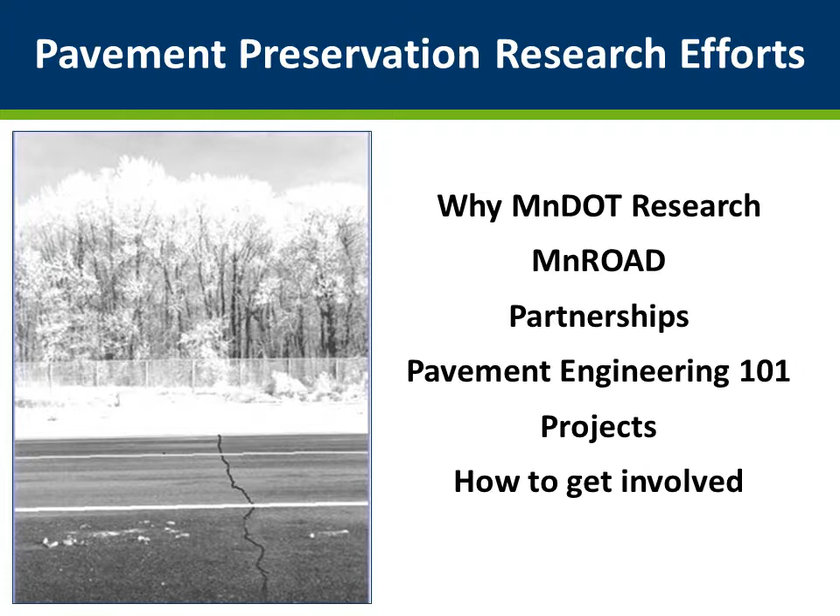A brief overview of what I'm going to be talking about today: first, why does MnDOT do research? Then what is the MnROAD facility? Who are our partners, who do we work with? I'll also cover pavement engineering 101, the challenges we face as pavement engineers, and then my favorite part, highlighting some of the projects, and how students especially, or anyone interested, can become involved with us.

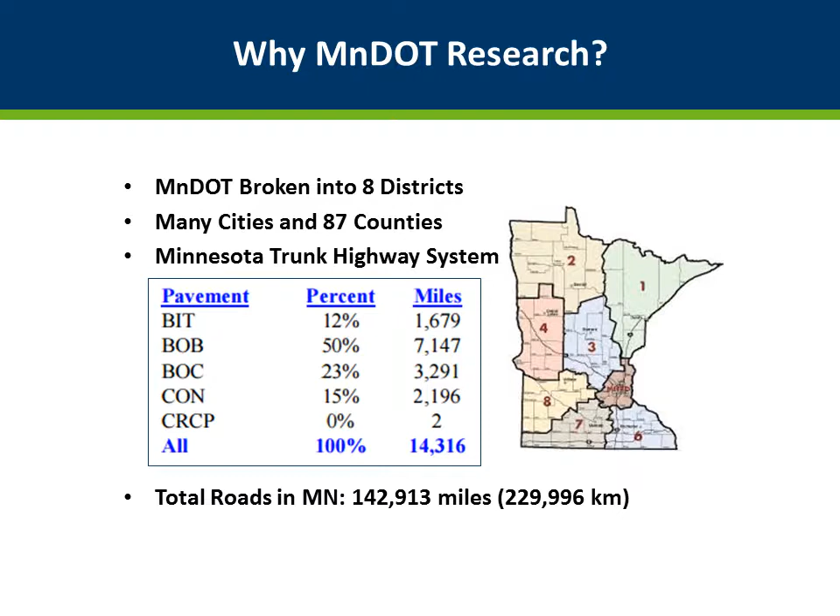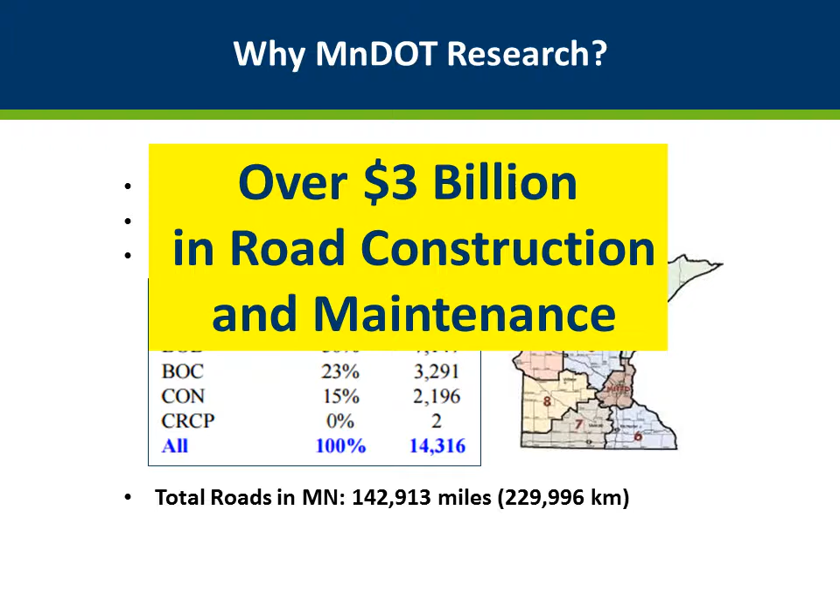So starting off, why MnDOT research? MnDOT is responsible for over 10% of the roads in the state, a combination of bituminous, which is asphalt, asphalt over concrete, and concrete roads. The big reason why research matters is that last fiscal year we spent over $3 billion in road construction and maintenance. So our goal, especially at MnROAD, is making our pavements last longer and cost less financially and cost less to the environment.

Now getting into the MnROAD research facility, how many people have driven I-94 from the cities to St. Cloud? Thank you all of you for providing free traffic to our research facility.

Accelerated pavement testing facilities like MnROAD are pretty unique and rare. The only one even comparable in scale is in Auburn, Alabama, where they pay truck drivers to drive and traffic their trucks. Here at MnROAD, we use the general public and the traveling public to traffic our roads.

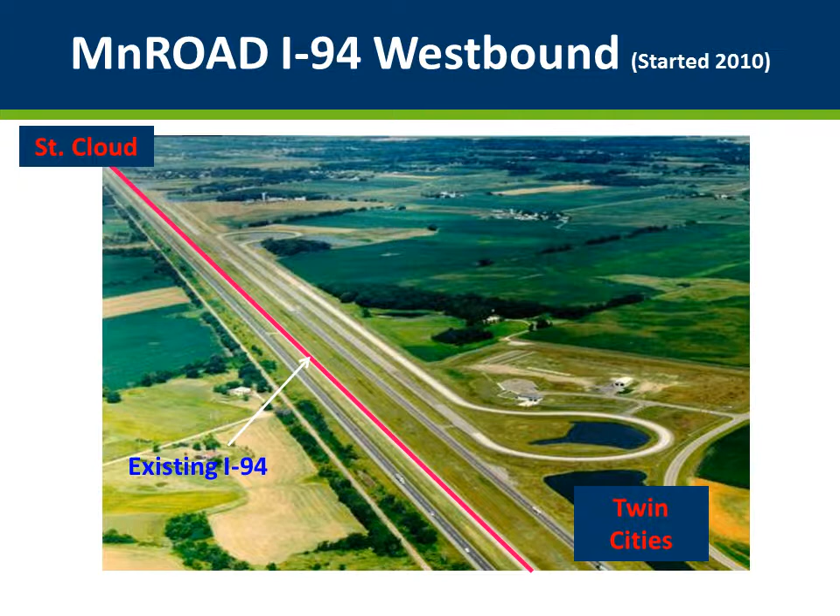We have the existing I-94, built in the early 70s, a jointed concrete pavement. Parallel to that is what we call the MnROAD main line. If you've driven this, you've seen the big overhead gantry lights, which divert traffic to the right, and then you'll see the pavement change every 500 feet, looking like a quilt. Each of those is an individual test section where we try different pavement materials and structures. I'll get into some of the sensors we have going on in there as well.

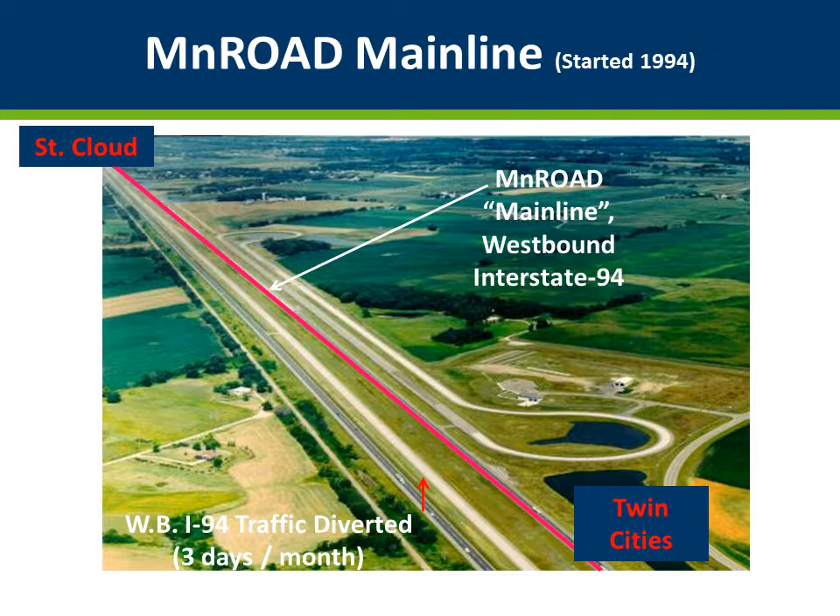Next time you drive through, now you'll know what you're doing, and there's even an AM radio band you can turn to and entertain your whole family as you're driving through, in case you forget some of the facts I'm presenting today.

We also have this loop, a little further inside, divided by a fence. This is a closed loop facility where we have a semi-truck driver whose sole job is to drive circles around it five days a week, eight hours a day. He shoots for 80 laps on this 2.5 mile loop, and we have the same kind of setup with 500-foot test sections.

The purpose here is more to simulate a low volume road, so we have thinner pavement structures, less base work, less preparation, and some more exotic materials. For example, in 2017 we brought in a bunch of clay to simulate a late construction season event, where we had wet, sticky clay we couldn't pave over with typical paving methods. It became a large stone base experiment, so we brought in softball-size stone, one section with 9 inches of this large stone base, the other with 18 inches. We learned within half a day trying to place the 9-inch section that it wasn't going to work; we needed a reinforcing grid to be able to do that.

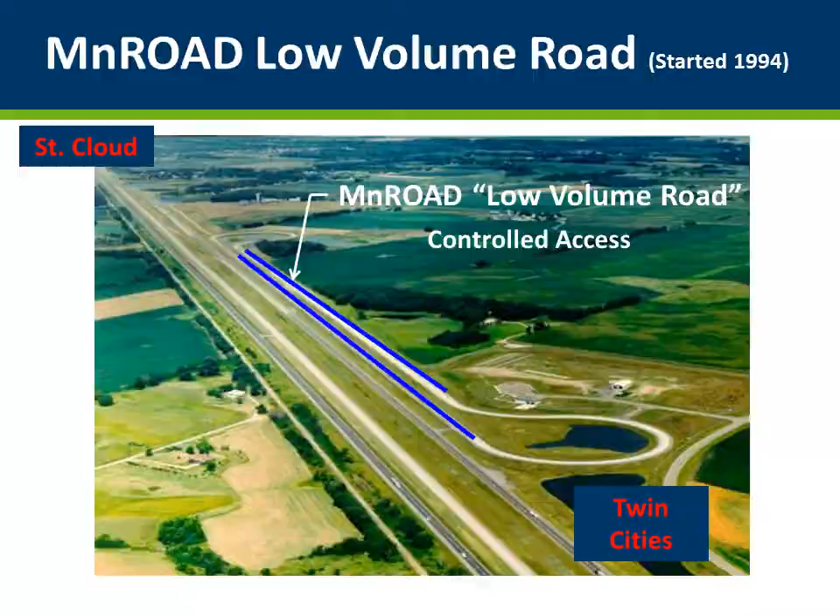A little bit of history: MnROAD was initiated in the early 90s and has 23 years of customer service. It is an internationally recognized facility. For those who haven't been there, I'd encourage everyone to go, whether you're a student or a practicing engineer. I have my email at the end, you can take a card, but we're always willing to come show you, because as taxpayers in Minnesota, you've helped support this research effort, and it's truly a treasure in your own backyard.

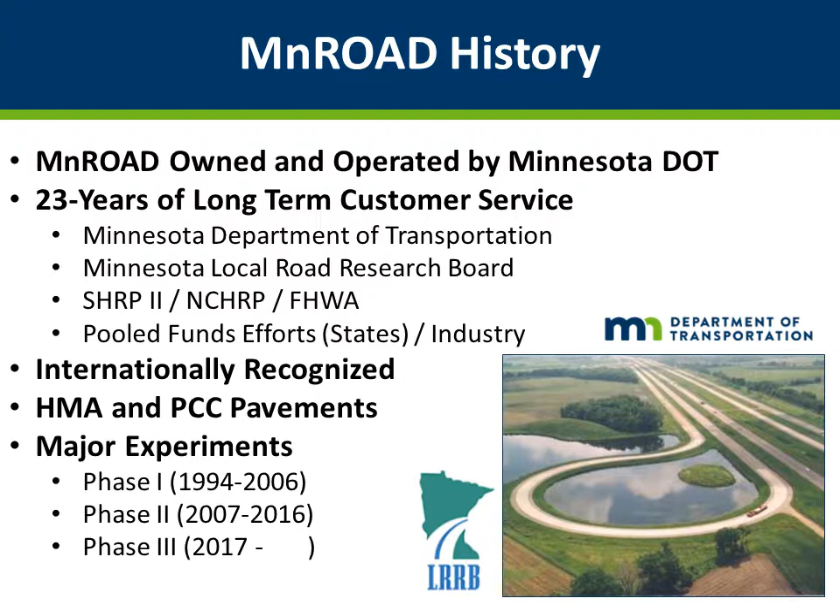We have asphalt and Portland cement concrete. We're currently in the third phase of MnROAD, and I'll get into it more later, but we're expanding our partnerships as well. We still do MnDOT-only research, with a couple sections internally funded just by MnDOT, but we also have partnerships with other upper Midwest states, one of the research facilities in Alabama, federal highway, and private industry partners as well.

So there are currently over 35 ongoing research studies. We have test sections combined into research studies with 141 unique test sections. On the I-94 mainline, we have 12 ongoing studies.

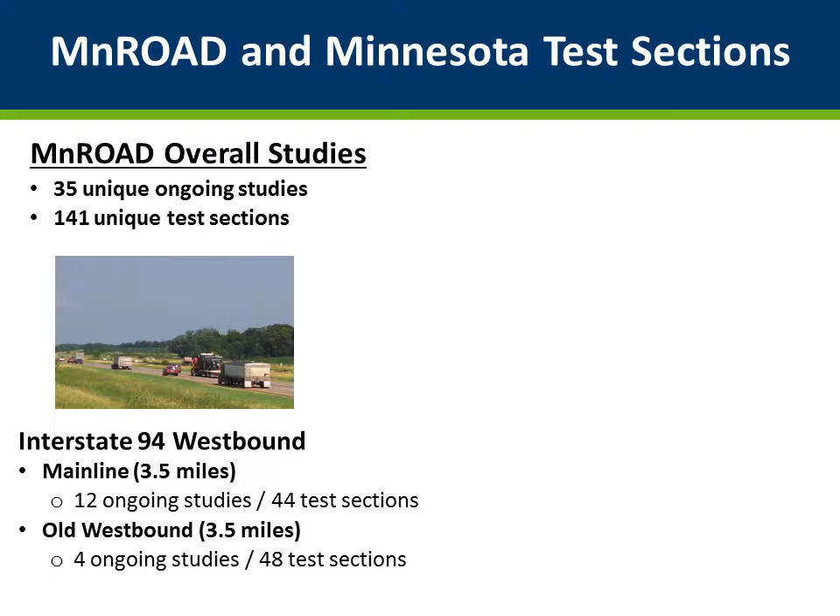And then in 2017, we went back to the original concrete pavement, which we call Old Westbound, the original I-94 concrete, and we started placing research sections on there. We don't get as much traffic as we do on our main line because we have traffic one or the other, and we try to keep traffic about 80% of the time on the main line.

And only switch it back to the old original construction when we need to do our testing or construction type activities. And then the low volume road, there's 19 studies, 49 different test sections. I list the Minnesota Local Road Research Board here - they're one of our major sponsors and players with MnROAD and supporters, even from the early 90s.

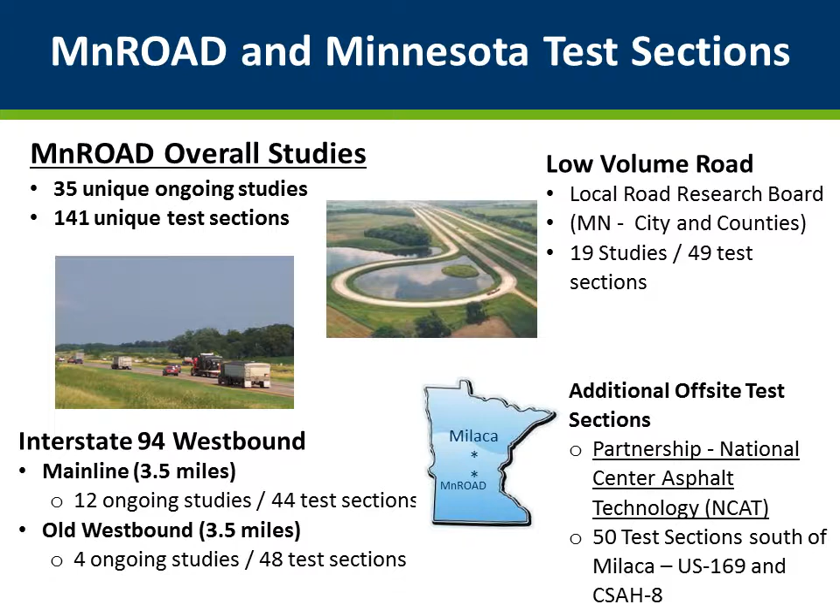They're one of the reasons MnROAD exists today, and we still try to keep that relationship and support local county road research that a lot of us drive on our way home every day. And then in 2016, we started some off-site experiments, which are still under the MnROAD umbrella, near Milaca. We have on 169, and I'll talk more about these later, some pavement preservation experiments on US 169 as well as County Road. It's in Pease, Minnesota, for those of you that are familiar with that area.

So our traffic loading, it is live interstate heavy truck traffic, about 13% truck traffic on the interstate. I would argue it's a little more than that just from looking out the window and seeing the trucks go by all afternoon and all day.

And then our low volume road, we have a 5-axle typical tractor trailer that is loaded to the legal limit, and he drives in circles 80 laps a day.

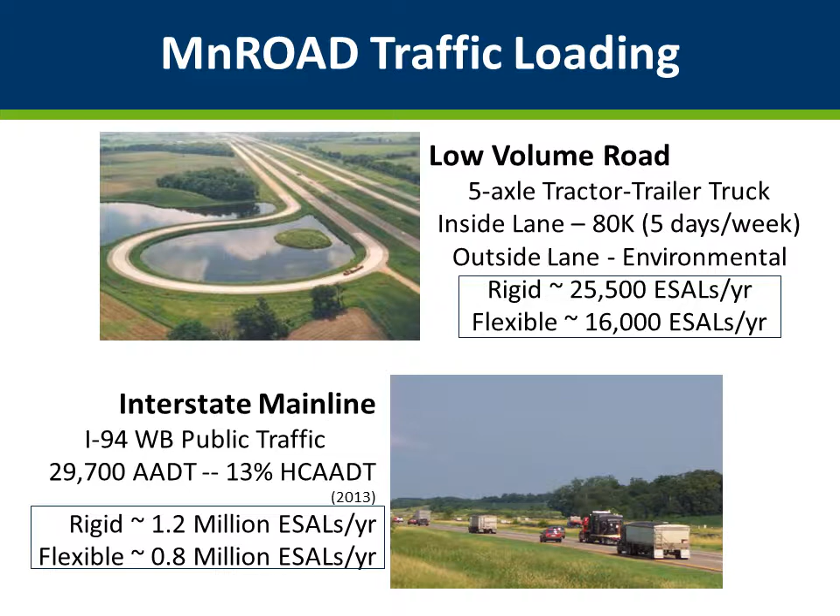So operations support, which is the team that I am a part of, we're actually based in the Office of Materials and Road Research within MnDOT out of Maplewood. And then we are back and forth between the two sites. Some of us are actually based up in MnROAD, which is technically in Monticello, Minnesota. But our job is to do research and development, partnerships, construction, traffic loading, performance monitoring.

So we build these test sections and then we monitor the performance. When I say monitoring performance, we are literally, I was out there yesterday counting cracks and making crack maps. We do everything from visual distress surveys like those crack maps to automated equipment that uses 3D cameras to do the same crack mapping that our pavement management uses on a network level.

And then we're measuring rut, IRI, the structural integrity with falling weight deflectometer. And then we have an array of environmental and dynamic sensors. Basically, our environmental sensors are monitoring how the pavement and the pavement structure is changing due to the environment. And then our dynamic sensors, how are they changing under traffic? We use our truck, our semi-trailer, which we have known weights on each axle, and then we measure the pavement response from that known axle weight.

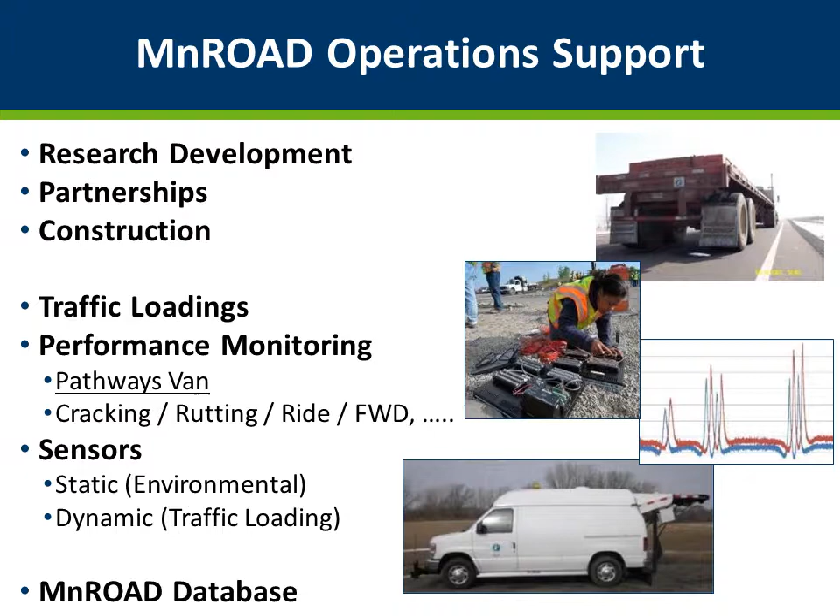And all of this goes into the MnROAD database, which is available to anybody. It's online, but it's accessed by researchers around the world. There's people from Alaska to Florida and everywhere in between who have done a thesis off of MnROAD data and have never actually been to Minnesota. I'm sure internationally as well, other places use MnROAD data, but just for an example, within the US university system, our database is used frequently.

Winter operations, we kind of are starting to dial it back for the winter. We're filling in our last few crack maps and that kind of stuff before everything is completely frozen.

But our low volume road, it is treated like a county road where depending on the truck driver and depending on how much snow, he might not even plow. He might just take the truck and go slow for a couple laps and let the snow kind of push out. Whereas the Interstate 94, that's actually taken care of by MnDOT District 3 maintenance out of Monticello.

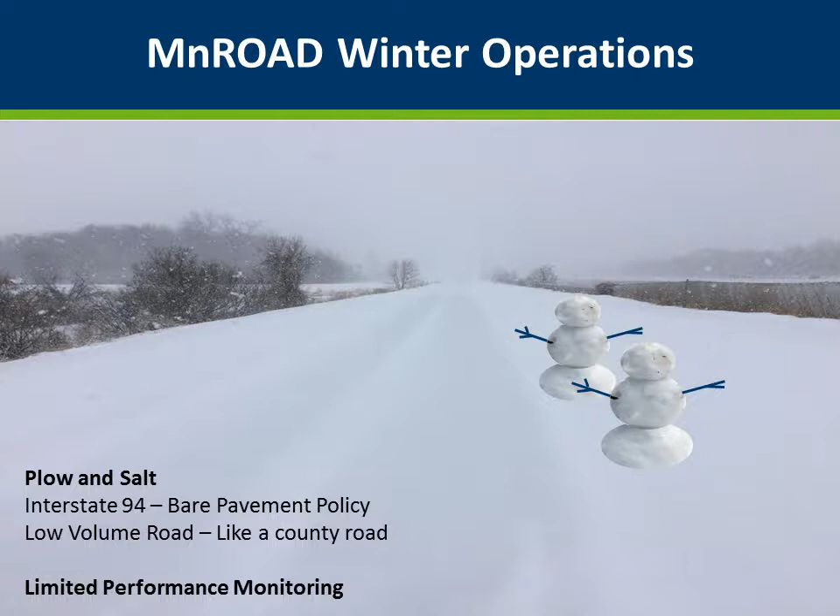There's a truck station that we work closely with, and they're actually the ones responsible for maintaining that. And they have a bare pavement policy, so after there's a snow event, they get all the way down to bare pavement just as if there was not a cold weather event.

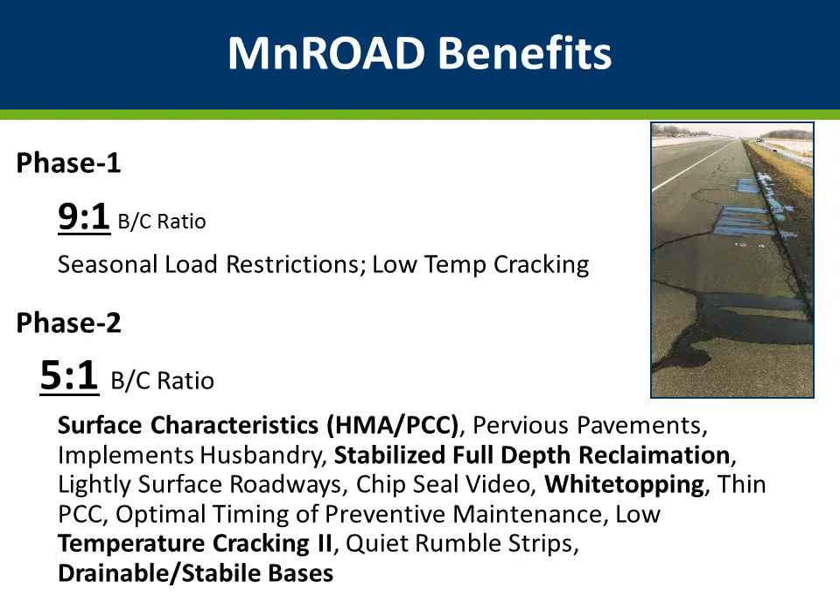Benefits of MnROAD. We've done lots of studies showing cost-benefit ratios depending on the specific experiments, and I'll talk a little bit more about these experiments later. But huge benefits, 9-to-1, 5-to-1, and I'll get into details of these projects further in my presentation.

So now to the partnership section. Who are we currently working with? In 2016, the National Road Research Alliance was initiated. How this got started was MnROAD had $2 million in construction money. We had test sections, but we wanted to reach out to other states and get more national involvement, so we created the National Road Research Alliance.

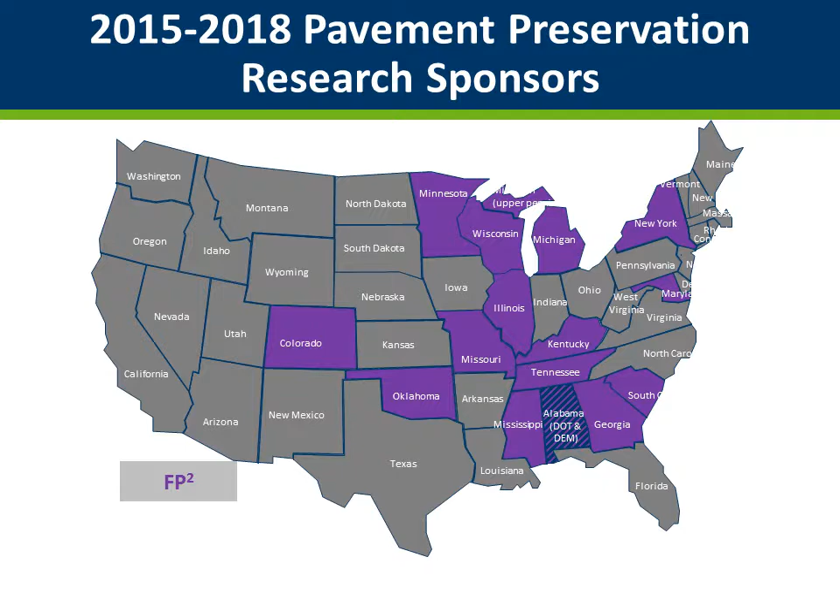Another thing - chip seals. Our chip seals get beat up by snowplows. They don't have snowplows, so their chip seals tend to stay a lot longer, but they do see more bleeding and flushing with some of their heavier chip seal applications that we don't see here in Minnesota.

Our base is mainly there to support our construction traffic, and so our interaction is with the slab itself that's moving. Whereas our flexible pavements do just that - it's an asphalt pavement, or bituminous hot mix as you'll also hear it called - but the pavement, a wheel comes over and it actually bends and flexes underneath the wheel load. Then we have our composite pavements, which are concrete over asphalt or asphalt over concrete.

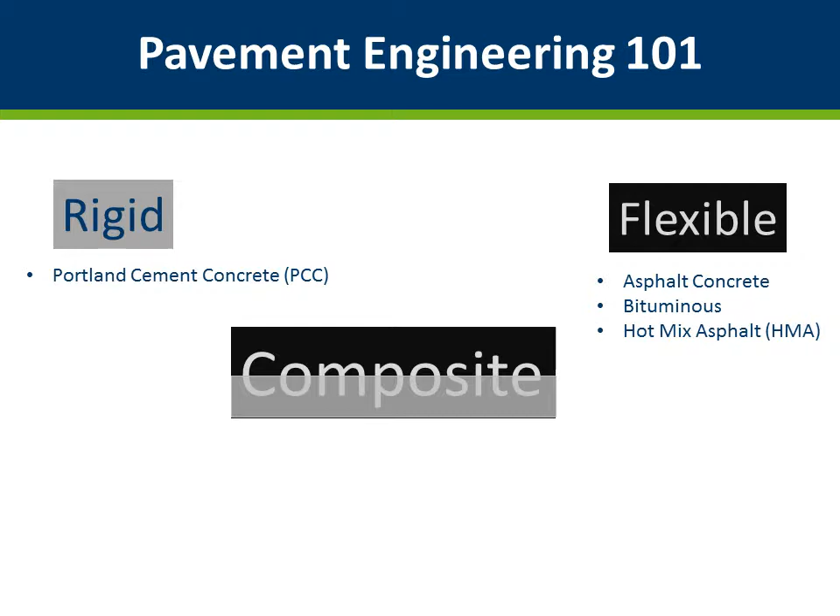Now looking at specific distresses we're trying to address and fix at MnROAD: in an asphalt pavement, we've got our top-down cracking, our rutting, which I'm sure everybody has seen at intersections. Rutting and top-down cracking are traffic-related distresses, so you'll see them occurring along the wheel path. Then you have transverse cracking, or low-temperature cracking as it's also referred to. Basically, as temperatures get really cold, the asphalt binder contracts and then snaps at the weakest point. It's just a stress relief, and then we get these cracks that are more or less regularly spaced within our asphalt pavements.

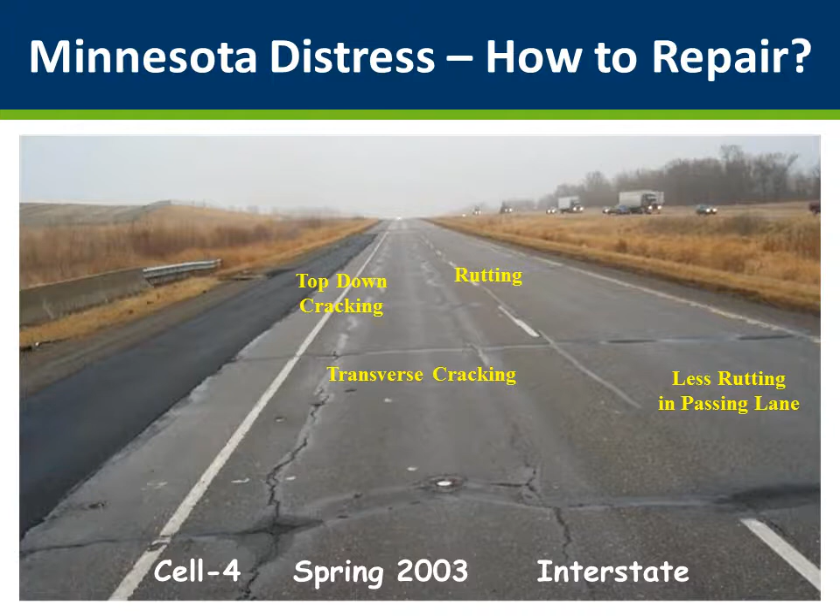Similar yet different challenges with our concrete pavements. For concrete pavements, your joints are your weakest spot where water can come in. You have faulting that occurs at joints where one panel ends up tilted, because the truck hits the front and pushes it down a little, raising the next end. We refer to that as faulting, and you can feel and hear it as you drive down old concrete pavements.

Now getting into MnROAD research projects, this slide is my favorite because it's the instrumentation I get to work with the most. This is a schematic of our sensors. We have PGs, which are earth pressure cells, basically a pressure plate, and then the LEs and TEs, which are longitudinal and transverse strain gauges.

Those are placed at the bottom of the pavement or at the bottom of the asphalt. So we're measuring how much our pavement bends under a wheel load in each direction, and how much pressure that wheel load was applying.

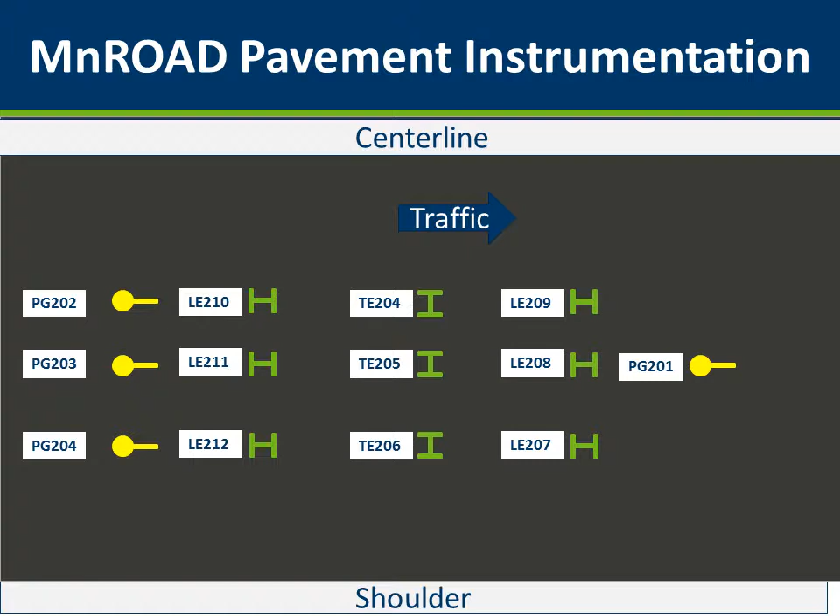From that, we're able to compare with our design software and see, okay, this was designed for an anticipated microstrain of 100, and we're getting a microstrain of 150 — we're going to have fatigue failures faster because it's bending more than we're designing for. That's the kind of information we gain from this pavement instrumentation.

Other instrumentation includes moisture gauges within the base and subgrade. We have temperature probes throughout the depth, so we can monitor the temperature profile within the pavement itself as well as within the underlying base and subgrade.

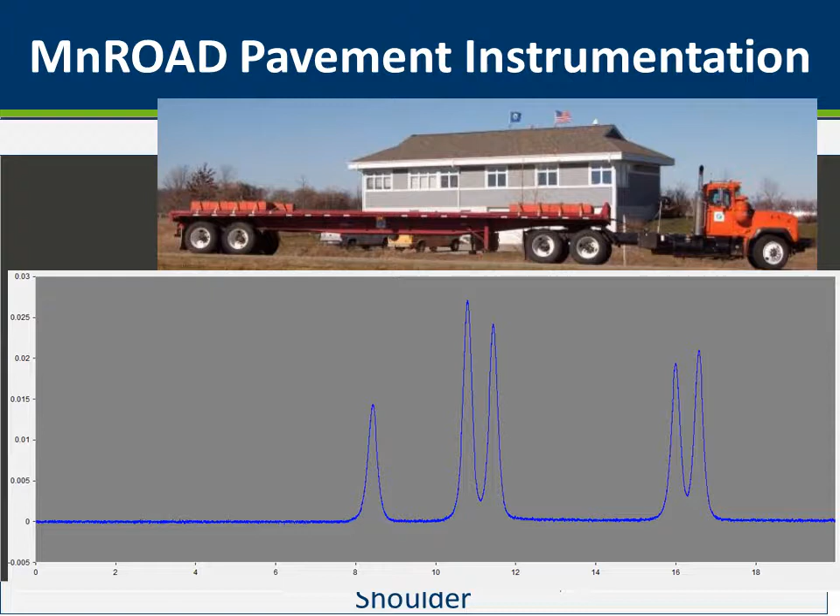Concrete gauges — we have strain gauges in concrete as well. We have two different types: one that measures truck load, and another that measures environmental load, measuring how much it's shrinking and expanding due to temperature change. We also have a new sensor we developed that we place between concrete joints, measuring how much that joint opens and closes, picking up the daily cycle as well as yearly or seasonal fluctuation.

So, specific projects — I've only been working at MnROAD for less than two years now, about 1.5 years, so a lot of these I wasn't immediately involved with, so I'll skip through them a little quicker. But some of the big highlights we've learned over the last 20 years...

Importance of drainage — yeah, it sounds intuitive, but what MnROAD is able to do is get data and prove, yes, drainage is important. We have a section here that has drainage, this section doesn't. We see failure faster in the section without drainage, and then we're able to cut a trench, dig into it, and see what water in the base or subgrade is actually doing to our pavements.

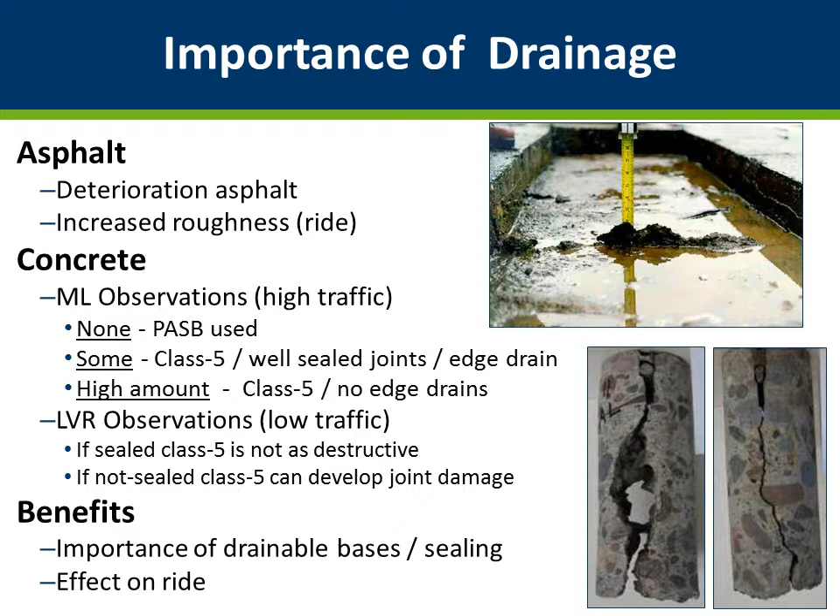Along the same lines as importance of drainage, importance of sealing — both concrete and asphalt, crack sealing or joint sealing. We have lots of side-by-side type comparisons. I'll let you guys read that one.

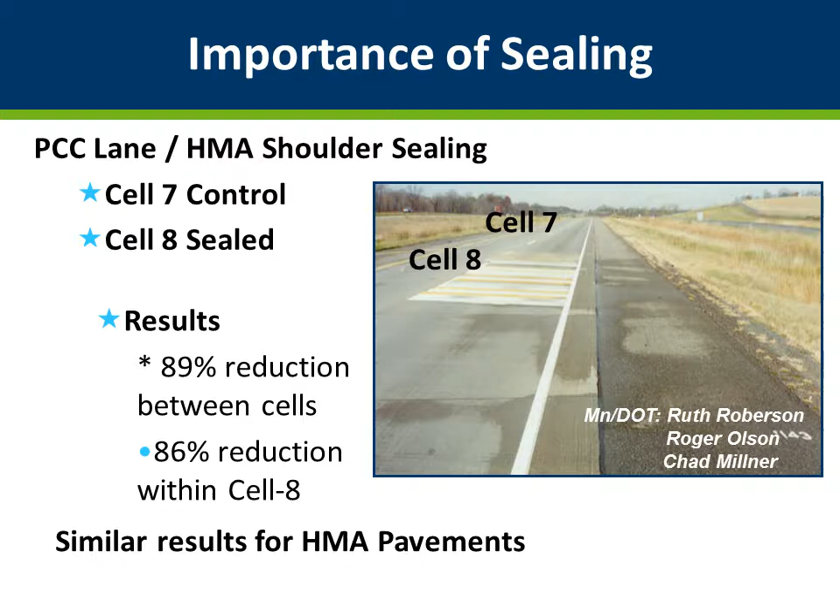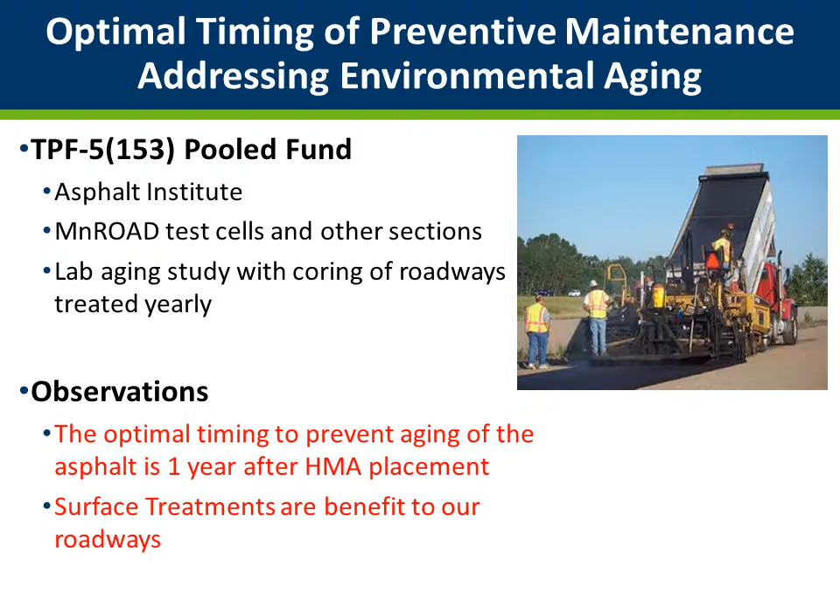Optimal timing of preventative maintenance. This is one of the things that a lot of you guys know, and those still in school will soon learn — a lot of our infrastructure has already been built, and the challenge we'll face as engineers is maintaining that infrastructure, keeping our current investments and making them last as long as possible, but also continuing to innovate, bringing in new materials, making improvements to make the infrastructure better, and doing it on a shrinking budget.

We've done a lot of chip seals at MnROAD, actually on the interstate main line. Those familiar with chip seals know it's typically used as a lower volume type treatment. We've done it at MnROAD as well, with interstate traffic going 70 miles an hour, and when done properly, they can perform well and provide a nice resurfacing treatment.

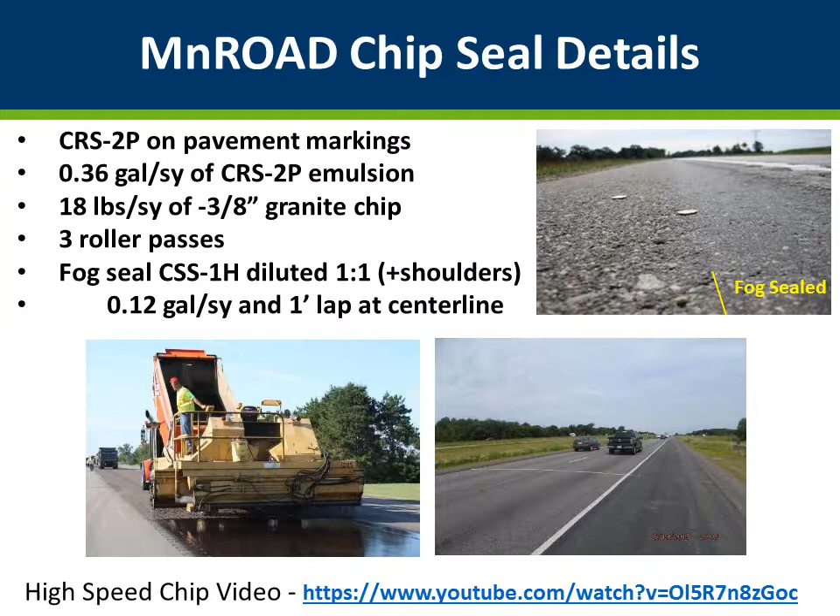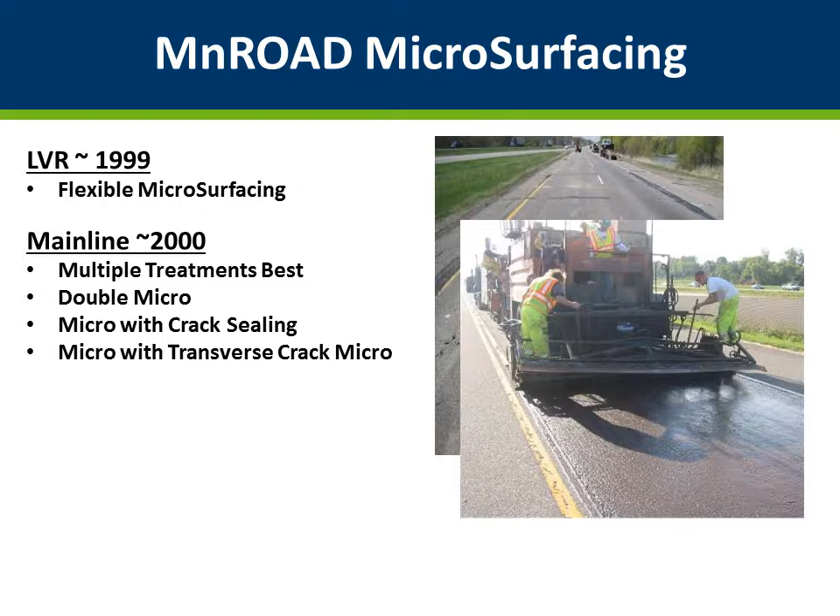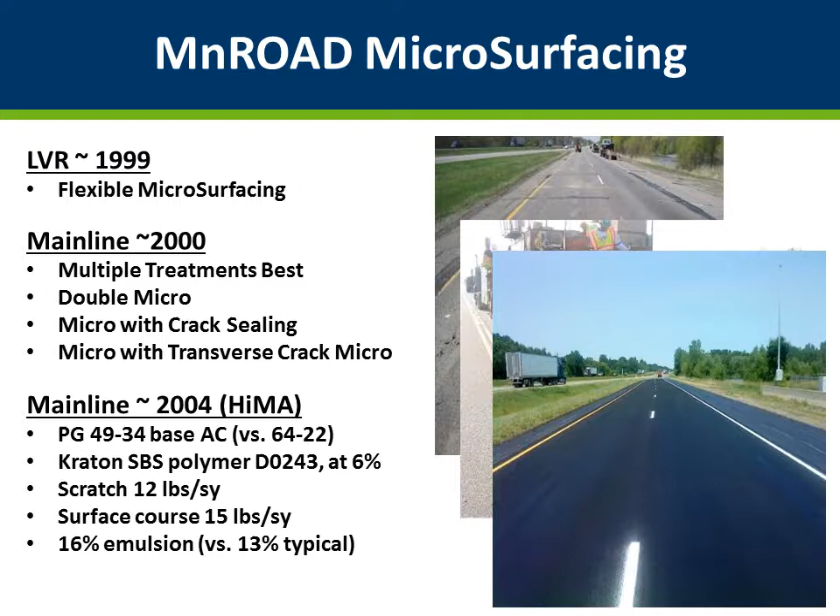Microsurfacing is another thing we've used at MnROAD, kind of a preservation type. It's applied in a slurry, a combination of asphalt with a little bit of cement in it, got real fine aggregate, and ends up with a nice smooth black surface. Some of our work in MnROAD has shown it can be a little brittle in some applications, where we're seeing cracks reflect through a bit quicker than with a typical asphalt layer.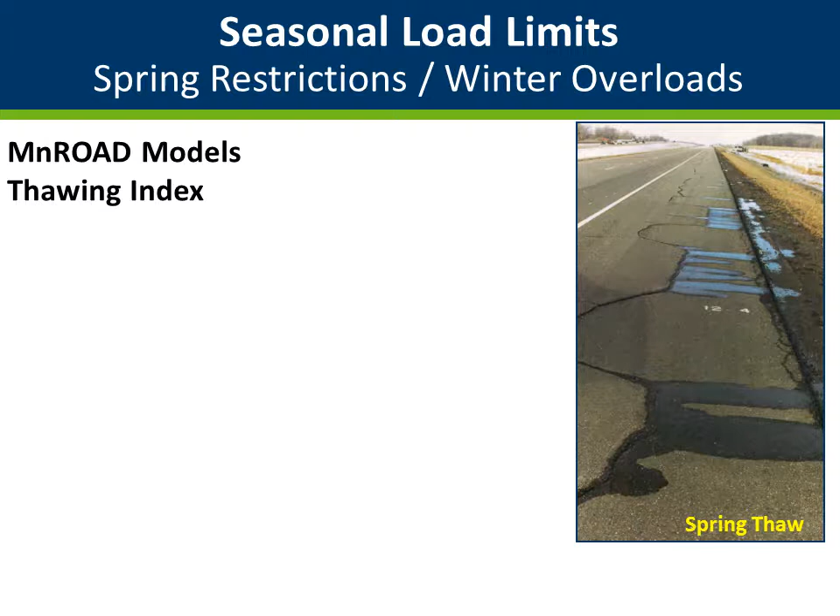This is in Otter Tail, Minnesota. What we're able to use this for is to determine when we're going to be restricting truck traffic or heavy vehicles.

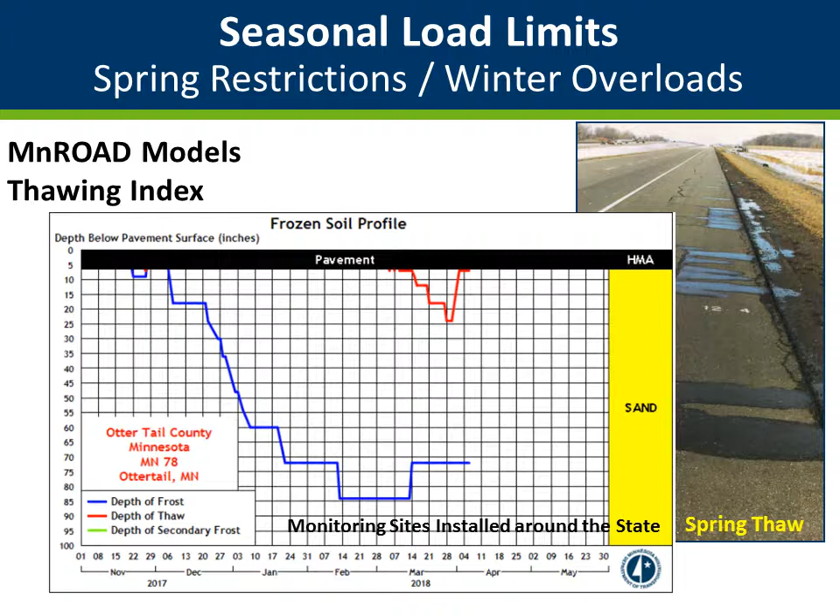For those not familiar with seasonal load limits, the issue is this area in red here, where we have a frozen subgrade. The majority of our structure is frozen in the spring months, and then as we come out of that, it's thawing from the surface down, so you get this soft, squishy, mushy layer on top of your frozen layer, underneath your more rigid pavement layer, and all the water is trapped right there. That's why when you see seasonal load restrictions, we're trying to prevent heavy vehicles from damaging our pavement at its softest point.

We do this at MnDOT, separated out by zones. We have sensors in each of these zones, a couple locations in each, monitoring the frost depth. That's why every year the seasonal load restrictions and the timing of it changes a little bit.

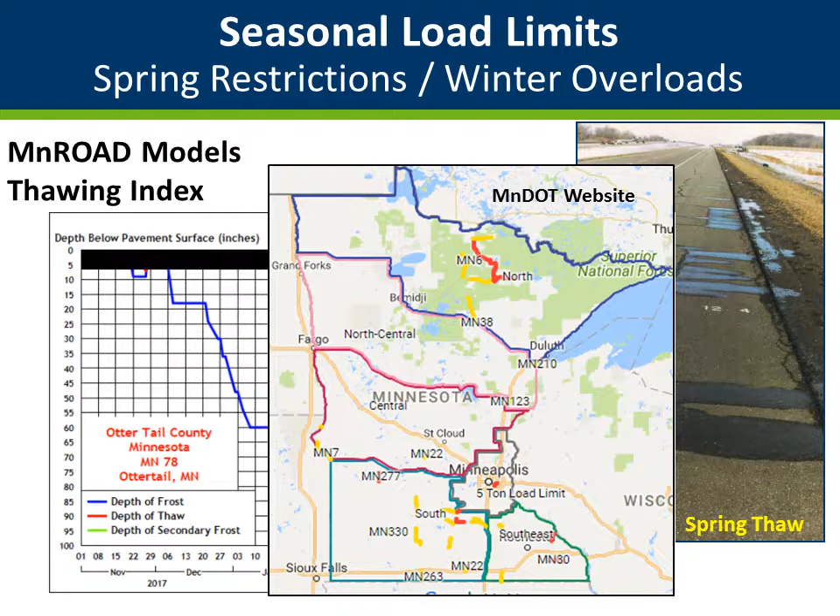One of the more unique studies we've done at MnROAD was implements of husbandry - basically how farm equipment damages a typical county road. In this study we paved a special section, both concrete and asphalt, and brought in all sorts of farm equipment and husbandry equipment. We had sensors in the pavements, different bases, different subgrades, to see how the pavement was responding under these farm equipment type vehicles, like we see on our county roads.

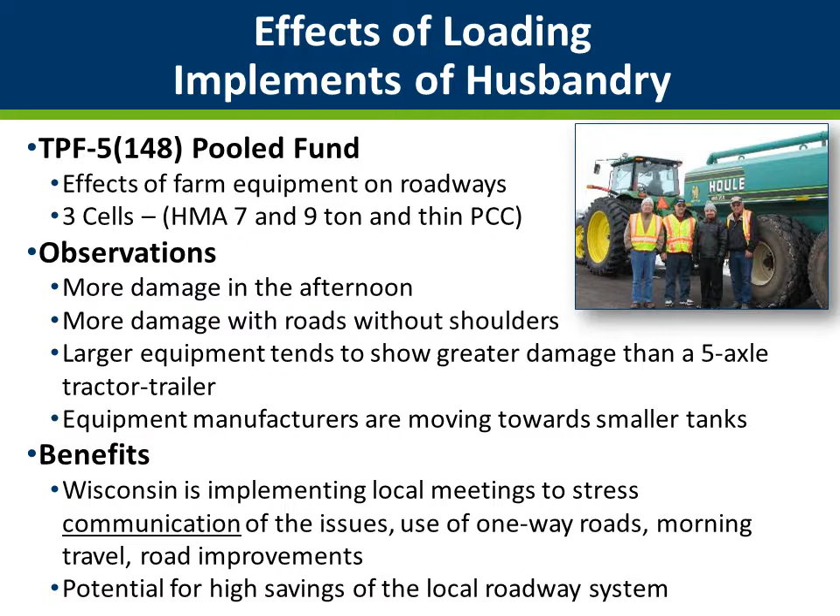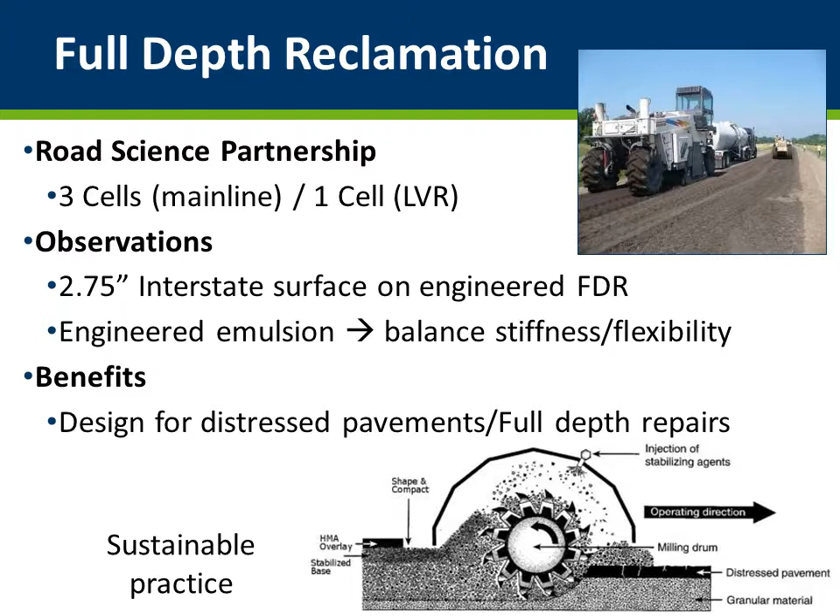In pavements and in our civil engineering industry in general, we're doing a lot more recycling than ever. This slide shows one of our projects on full depth reclamation, basically taking the existing pavement structure, grinding it all up, adding a bit of stabilizing, whether it's cement or asphalt, and paving a new road over the top utilizing the materials in place. We're eliminating truck traffic, eliminating the need to remove old material, and we're able to get a nice clean surface and base that we can pave over with a lower thickness pavement layer than we typically would.

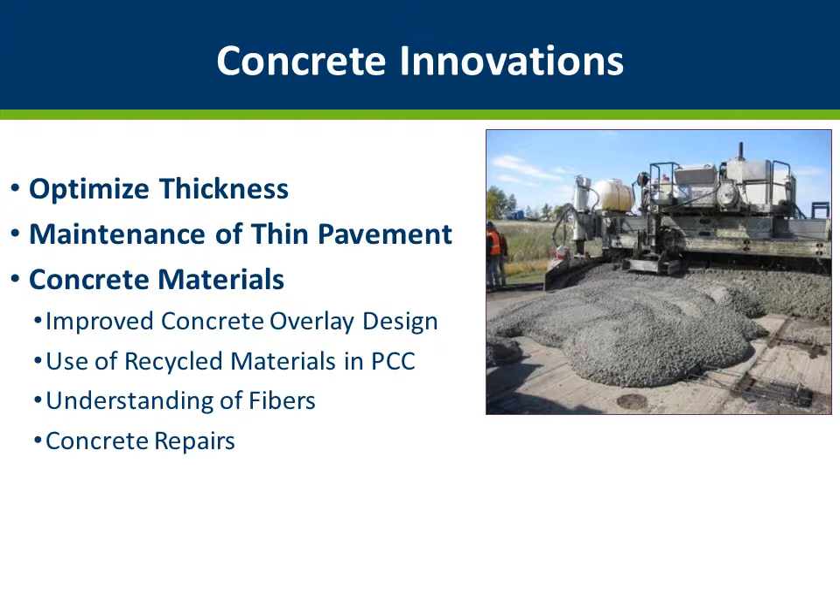Concrete innovations - there's been a lot of work optimizing thickness, thin pavement designs, smaller sized panels, bonded and unbonded concrete over asphalt. The design manual for bonded concrete over asphalt was developed based off MnROAD research. That's this slide, our whitetopping, which concrete folks love - covering up the asphalt roads and putting a nice white concrete road down.

What we're able to provide at MnROAD is the ability to push the limit. In 2017 we built a 3-inch thick concrete pavement, and we replaced half of that a couple months ago just because it started to rubbleize under that semi-trailer I showed. But we also built a 4-inch thick right next to it with fiber in it, and that's performing just fine on a relatively soft base. With the 3-inch thick, we learned the limit - we need to stay away from 3-inch thick, there's sidewalks thicker than that. So we're able to quickly learn and get a result relatively quickly.

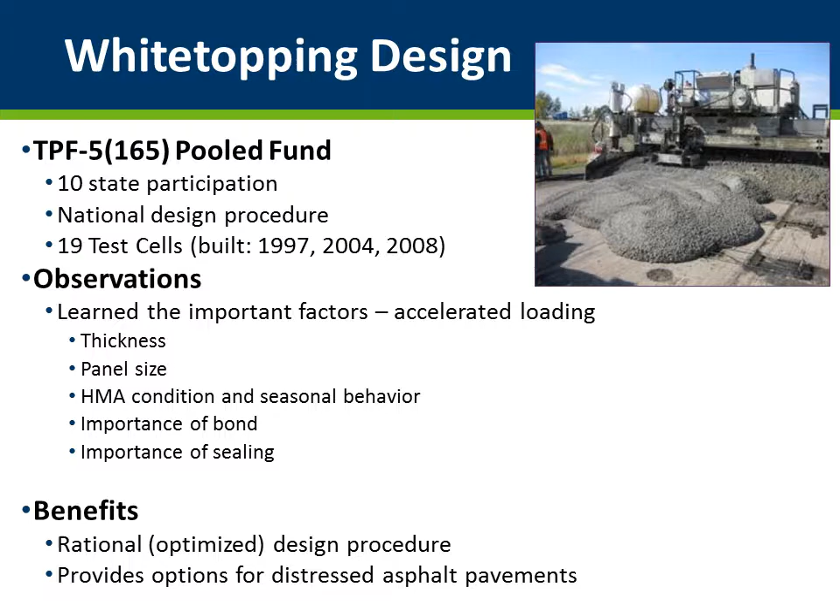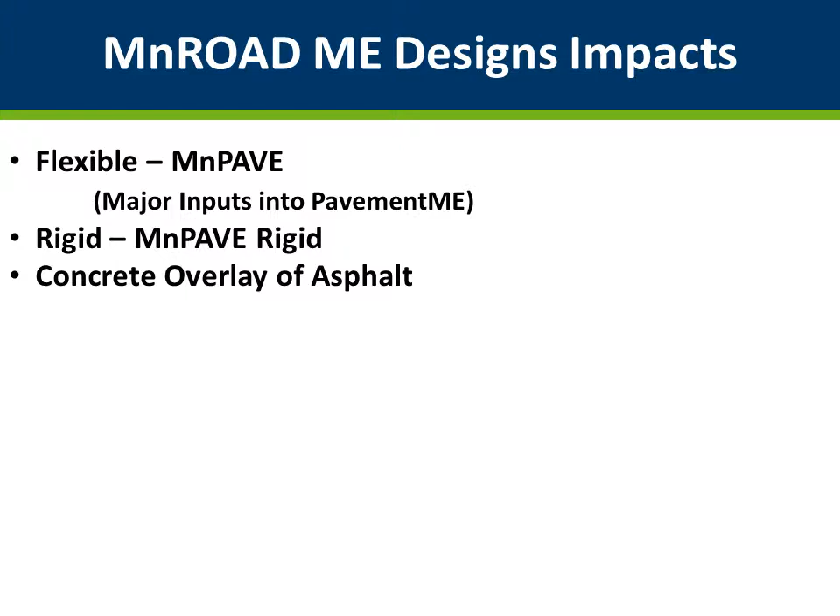Like I mentioned with the sensors, a lot of the data we're gathering at MnROAD is directly input into design manuals and methodologies, whether it's developing new design guides or calibrating existing design software.

One of the more unique things is all of this emerging technology we're able to use at MnROAD, whether it's asphalt rolling patterns or infrared technology. We've got three or four researchers in our office working with ground penetrating radar and rolling density meters, trying to bring new technology into the pavement industry.

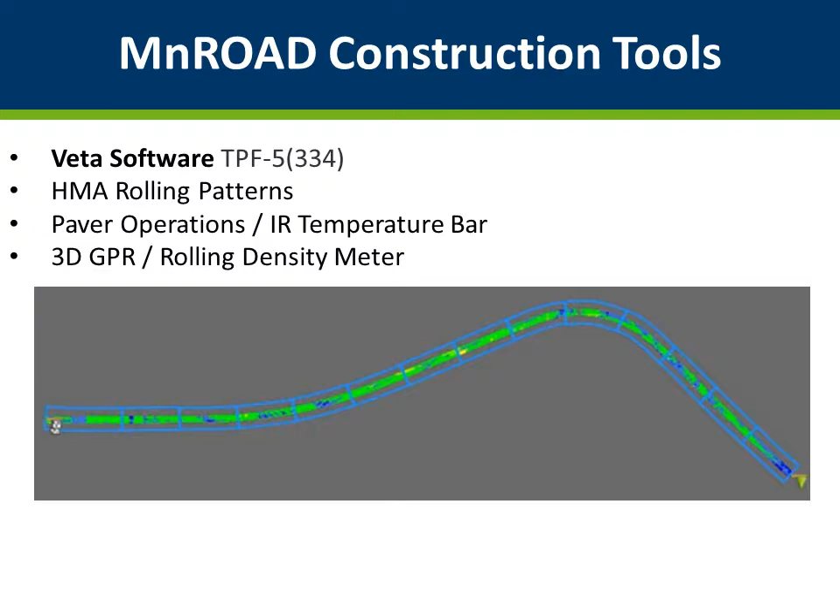As well as training contractors, we're also working with other states and with Federal Highway, trying to bring the industry on board and get this technology that's out there from academia implemented into everyday pavement construction.

I'm going to skip over culverts, and I'm going to skip over porous pavements, just in the interest of time.

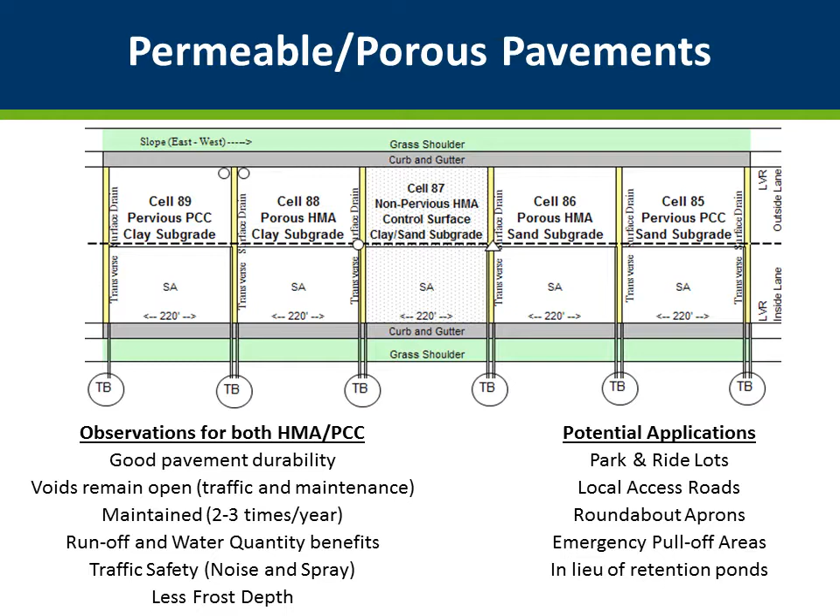Like I mentioned, we do a lot of partnerships. This one we just did actually a month ago. Cargill has a new rejuvenator product, which allows us to use more recycled or reclaimed asphalt pavement in our mixes. This is supposed to take old pavement that's been on the road for 20 years, beat by the sun and brittle, and rejuvenate it, allowing us to use more of it, use less virgin materials, and not have large stockpiles of old asphalt.

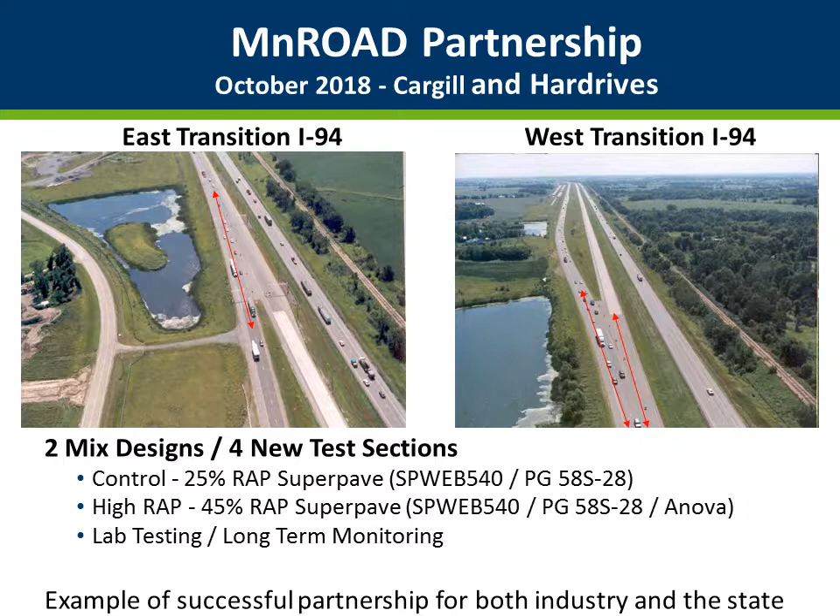I've mentioned these sections a lot already - it's off of US 169 in Mille Lacs County, and then County Road 8. For those familiar with Pease, Minnesota, this is on the east side of 169, with County Road 8 as our test sections. If you drive 169, you'll see the pavement change every 500 feet - looks a little different color.

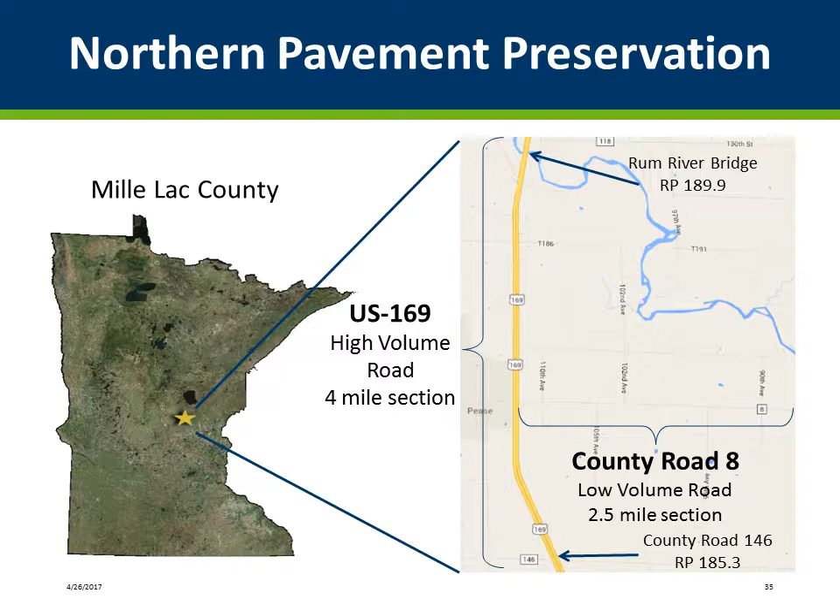But on the west side is my favorite part of going up there to do collection and look at these pavement sections - the Pease Cafe. It's a good place to stop if you're ever up there looking for a good home-cooked meal. I'm not a paid advertiser for the Pease Cafe, but I do endorse it. We have a lot of different treatments up there.

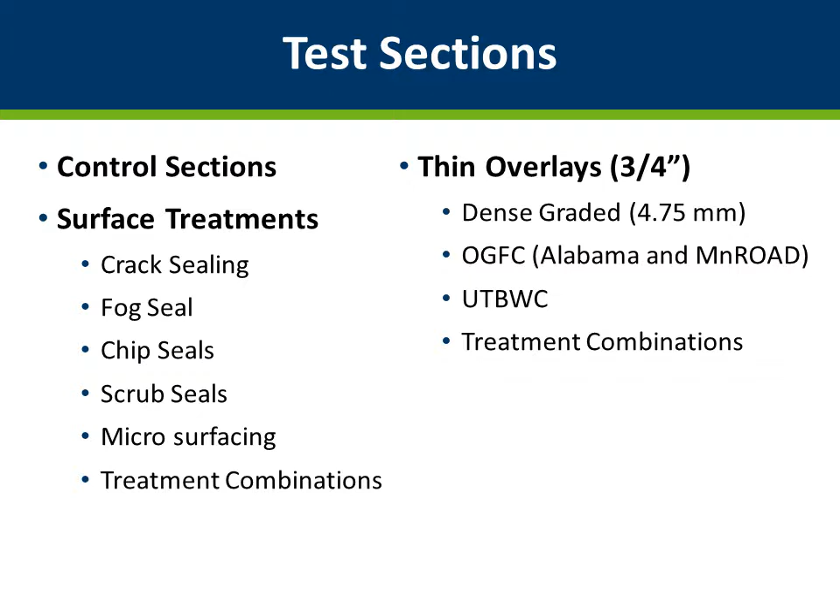There's 30 different pavement sections in each of those sites, and we have 2 different levels of traffic. We also have control or untreated sections in there, but what we're trying to do is build points along this curve so we can know when's the best time to do maintenance, what will extend our life the longest, and what the benefit of that is.

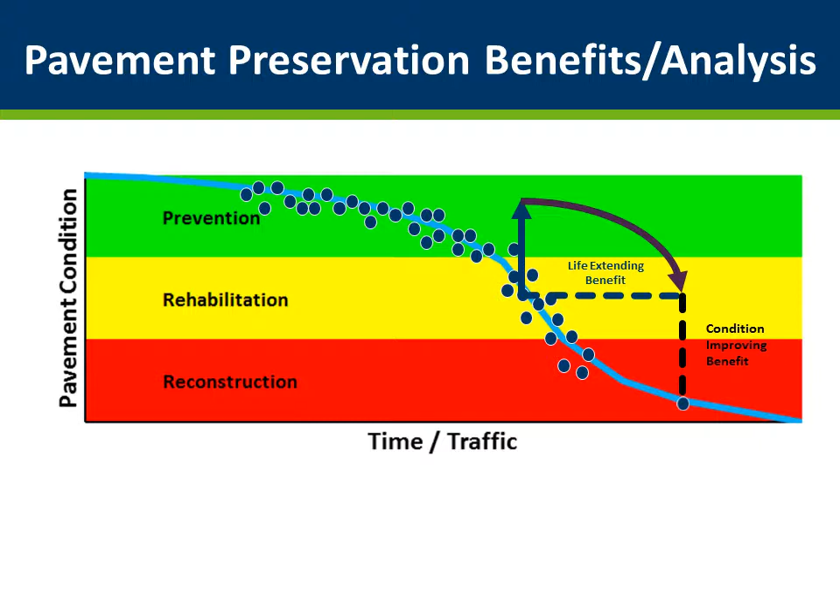How much are we saving by doing a treatment when we're still in the green zone, as opposed to waiting until it's really bad in the red zone where we can't fix it, or even in between in the yellow zone, where we're not really getting that benefit for our dollar as if we did it a couple years earlier.

At MnROAD, we're open to all sorts of other non-pavement type research. 3M has an experiment where they're looking at signage and vehicles interacting with the signs - vehicles being able to read signs and get information that isn't visible to the human driver.

Another partnership we did with Mike Kronzer's office - and this is my transition to Mike Kronzer - is last winter we had an autonomous vehicle and did autonomous vehicle testing at MnROAD. The idea was, how do these autonomous vehicles perform in a winter climate? We were able to use our low volume road facility where we could safely put water on the pavement in January and make ice for the autonomous vehicle to travel over.

We brought in a snow blowing machine - how did the autonomous vehicle interact with snow? This type of thing isn't typically done, since a lot of autonomous vehicle research is done in warmer climates, but MnDOT was able to do it because of the MnROAD facility.